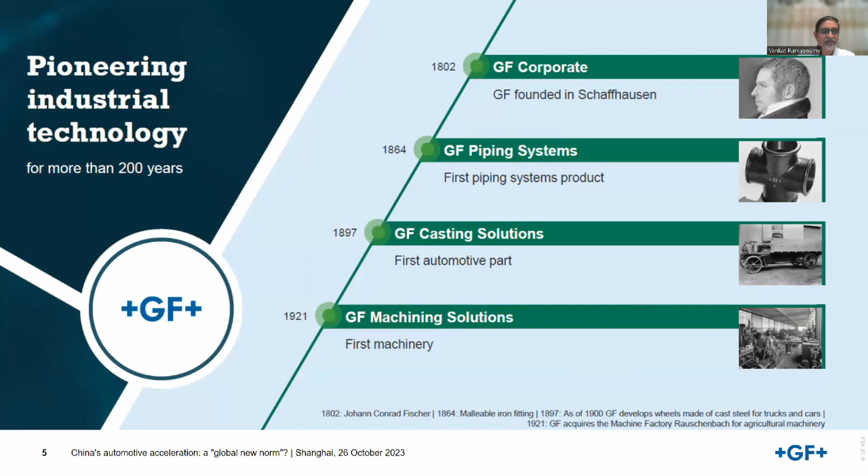GF Group is present in 39 countries with more than 15,000 employees, and about 89 production sites and 11 R&D centers spread across continents. These sites include a technical center, center of competence, a training and workshop area, and a huge service and spare parts location.

We are a sound and professional organization. GF Machining Solutions has a unique approach: to focus in depth on certain segments in order to ensure we provide solutions stitched to the individual market needs.

Understanding the customer and knowing the market trends is very, very important. We regularly communicate and exchange know-how and develop unique solutions for the problems of each individual segment.

GF Machining Solutions is spread across continents, and at GFMS we ensure we stay close to the customer and have advanced technology centers that give the best trainings, do faster test cuts, and display how customers can be cheaper, better, and faster.

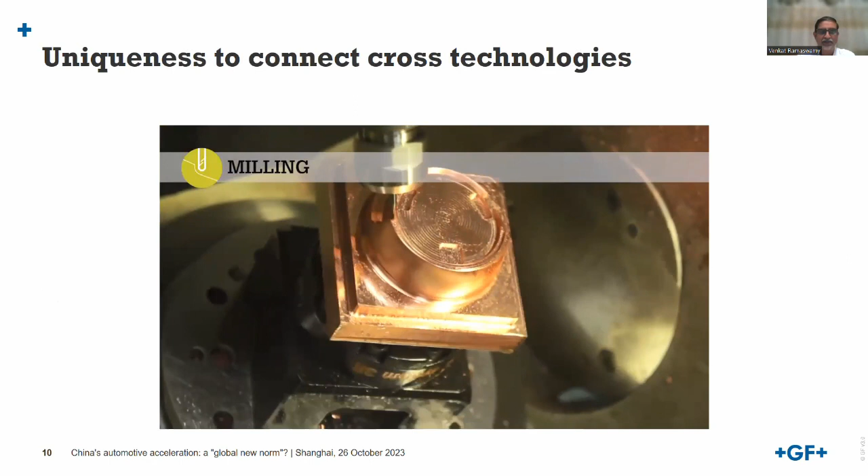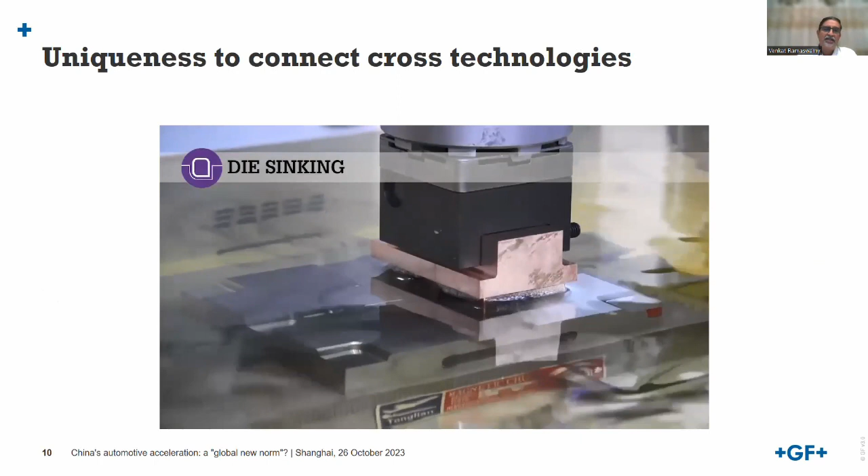I will show you a small video. GFMS is the only unique company that can have a proven solution to connect technologies for a tool or a mold insert from a milling. You may also want to move it to an EDM, either with quick change tooling, and then you may also have the same tooling move into a wire EDM. So you don't lose reference, you don't lose accuracy. You may also have some tooling that requires laser texturing or laser cutting, so you can seamlessly move either manually with quick change or with automation.

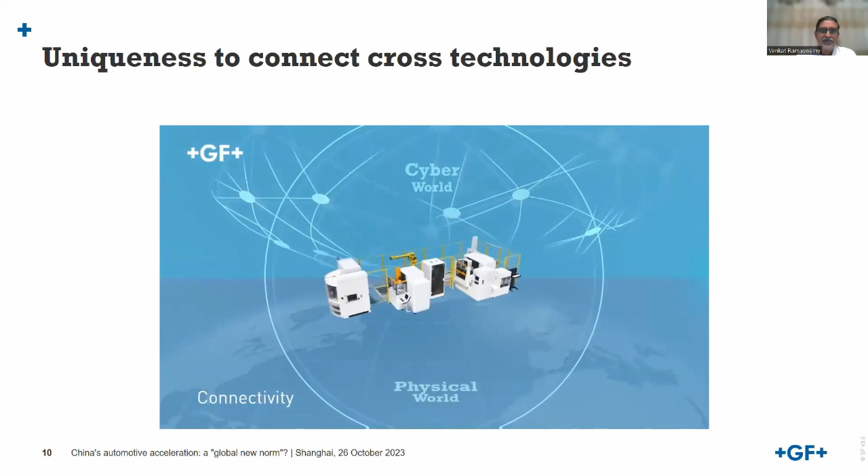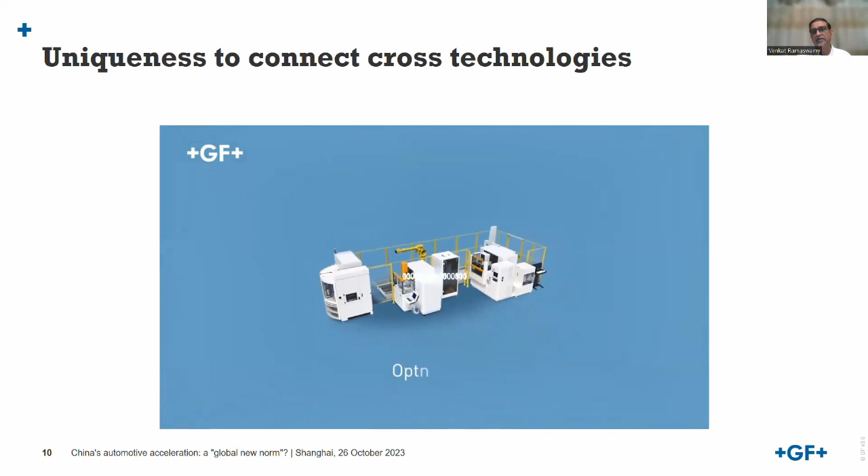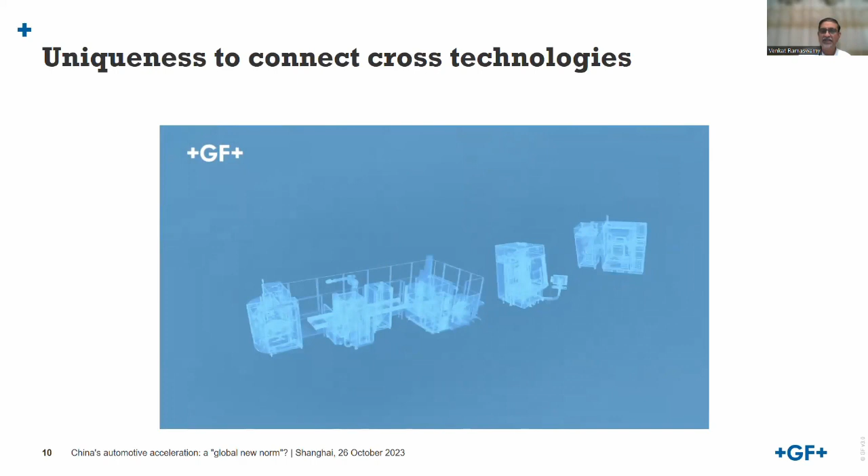Once you can do this automation, you are able to connect all kinds of technologies, accessories, CMM and so on in one cell. And it ensures that every part or mold coming out from this cell is 100% within drawing limits. You gain flexibility, you gain intelligence, you get data, and then you can optimize it. Once you optimize, you can also replicate this in your other facilities across continents. And when you have a next phase, want to add another machine or another technology, it is very easy and quick. So you can be flexible and sustainable. This is in a nutshell what GFMS offers and our uniqueness.

Now what I will do is show a set of data where we can see what is happening globally and also more focused on China, to understand China's automotive acceleration. We will also touch on what opportunities this is opening up for us in the room as mold makers across continents outside of China.

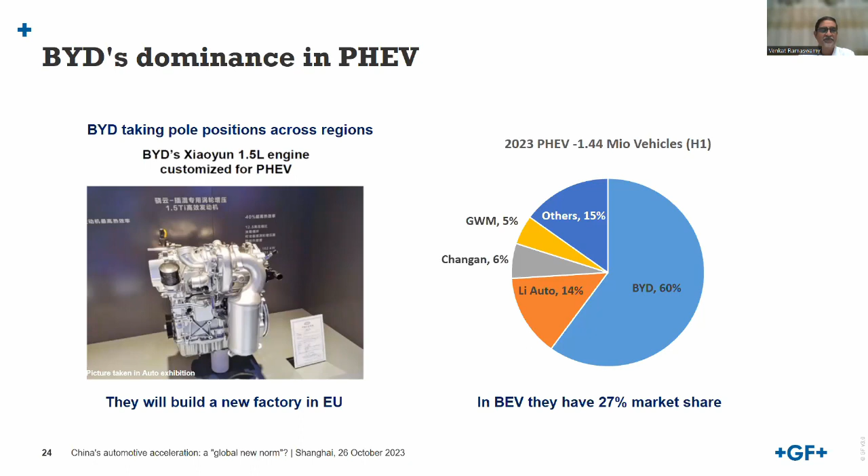So in China, the automotive segment is also well backed by the government. There is a 5-year plan that they announce, and the last one was the 14th 5-year plan. If anybody wants more details, you can write to me, I can share. The government details it very clearly, the goals and how it can be achieved, what should be the way, everything is detailed. This helps the entire supply chain get prepared and adapt to the new developments.

I was reading in publications recently in the ETMM magazine, which mentioned that in spite of COVID market downturn, currently in China, Chinese tool and mold players are edging the technology gap with the revolution in NEV. The report says that in the areas of mold for parts of plastics and rubber, forming tools and punches, sheet metal, and die casting tools, they are really having growth going to a positive side. The article was also conveying that this is similar in Europe, but very slow, or just starting the revolution of NEV. So there is something coming near the doorstep. The article is indirectly conveying that good things will also come to Europe soon.

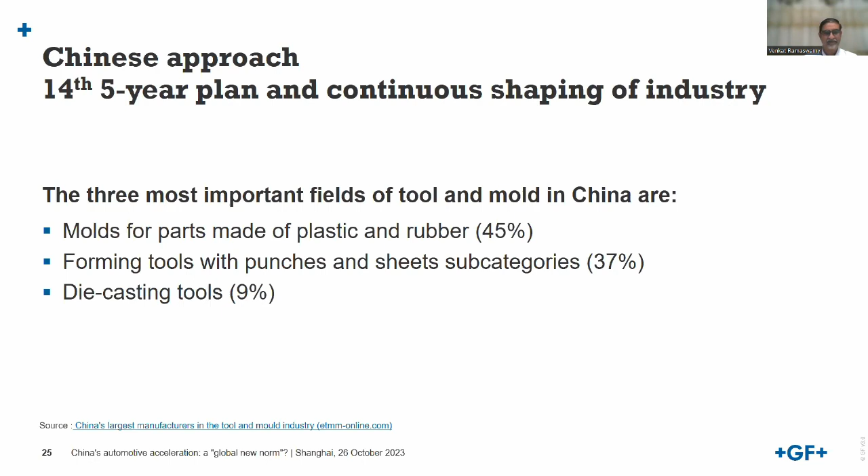So what are the challenges the mold maker faces in China? As in most countries, China also faces a labor shortage. Don't be shocked, because it is a huge problem - there is a severe shortage of high quality labor. Mold makers are looking to differentiate among their peers, because the study in the ETMM magazine also conveys that in China there are more than 221,000 active mold makers.

So they are looking for solutions to machine wide varieties, small batches, and they would like to connect technologies and be flexible. Because remember that with all this new NEV, there are a lot of new materials and tough materials applied, so the flexibility of machines to handle them is very critical and important. China mold makers shifted to automation and digitizing the entire manufacturing process. This helped them to increase efficiency, reduce labor, and be sustainable. So the digitalization of not only the CAM process, but the entire factory shop, helped them gain economics.

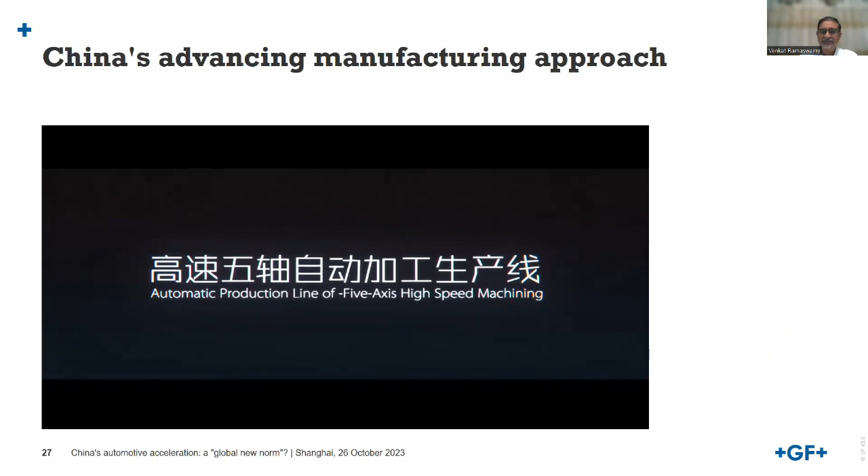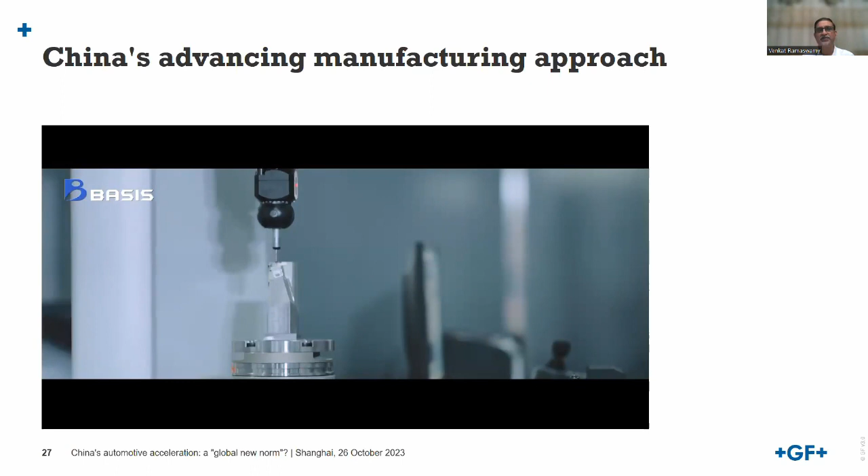This company basically does large and medium-sized molds, front-end modules. They also do dashboards, door trims, central console, seat trims, and so on. What they did is move all the insert and mold parts into an assembly, into this automation line.

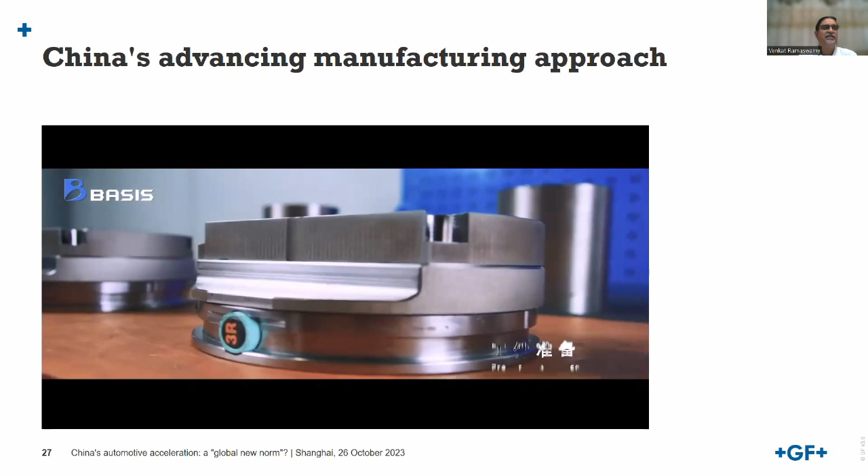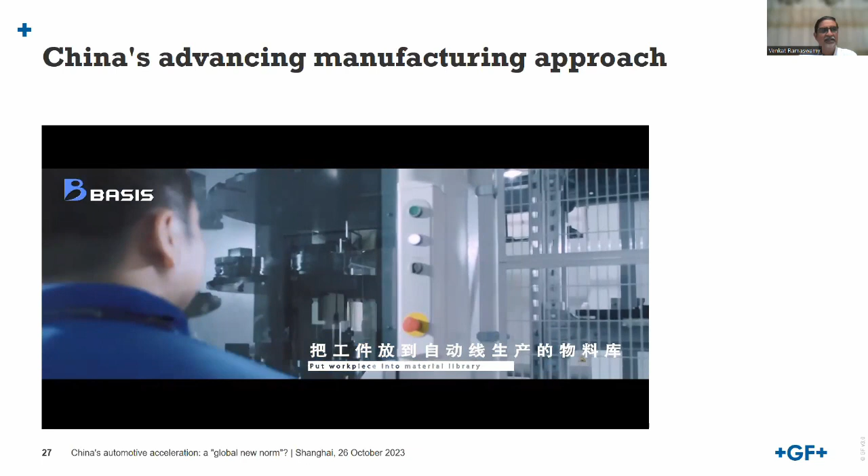They did this around 2015, integrating the technologies together, and they also incorporated CMM in the same line along with other accessories, so that every part coming out is 100% within drawing limits.

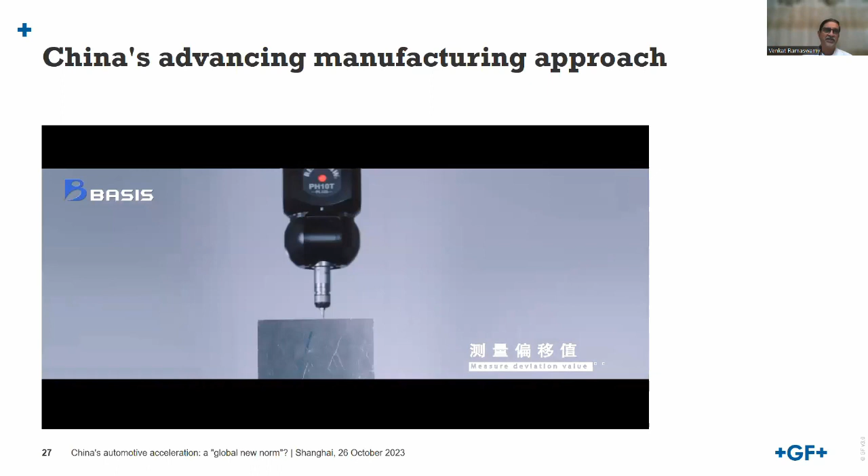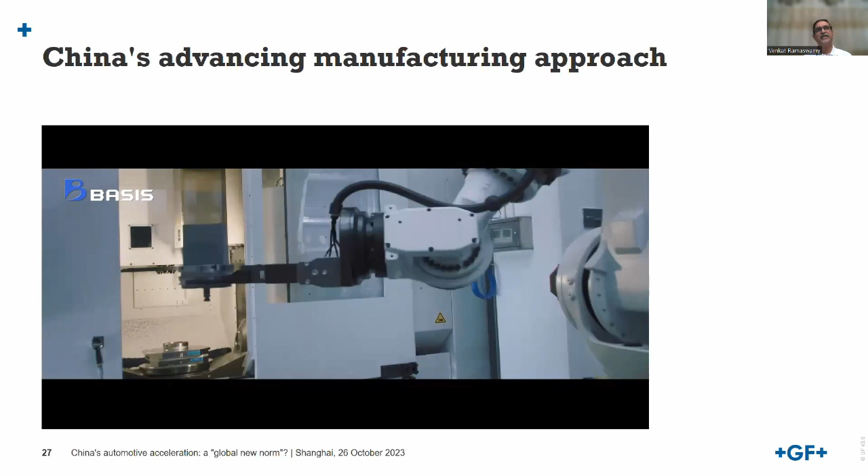After 3 years down the line, they set up a separate unit, fully digitalized, automated mold shop. They started to replicate, moving complete tooling into the automation line, which also helps them run unattended in the evenings, night, weekends, and during emergency periods.

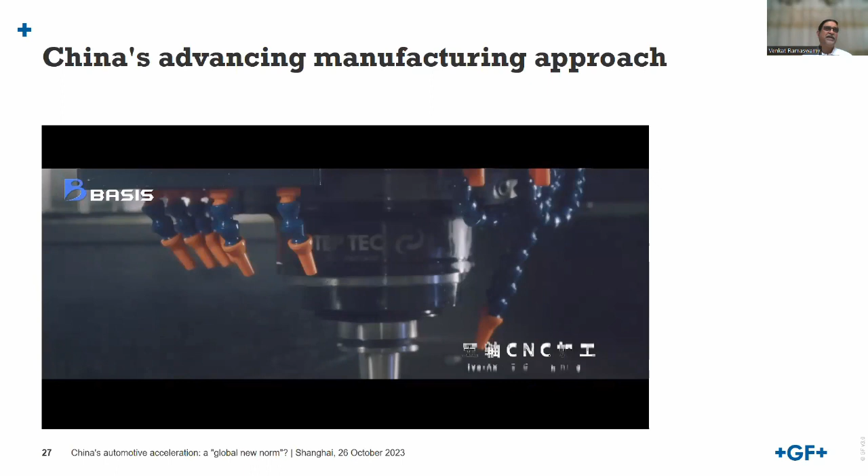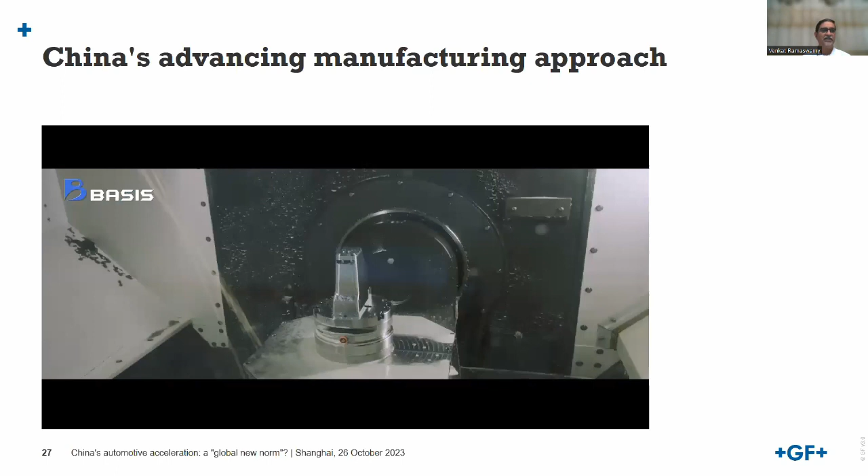So it reduced the number of labor, but they digitized the entire process—all standard operating procedures became digital. This really helped them, and they were at the forefront, pushing many Chinese companies to move in this direction. GFMS sold a lot of automation lines in the last 4-5 years in China.

But this is also not easy. So what is the unique practice that Chinese companies are adopting compared to traditional companies?

I was at an innovation roundtable workshop several years before, and a professor from Tongji University, one of the famous universities here in China, was delivering a speech on key trends of business model innovation from the perspective of Chinese companies. I recreated this based on his sharing.

This is China's disruption compared to the traditional company. What you see is a traditional company: after every S-curve of a product cycle, there is a gap before you can move to the next one. Traditional companies fill this gap by taking a disciplined jump, because before they move, they have to understand root cause analysis, do testing, and spend huge cost, time, and approval before they can move to the next S-curve.

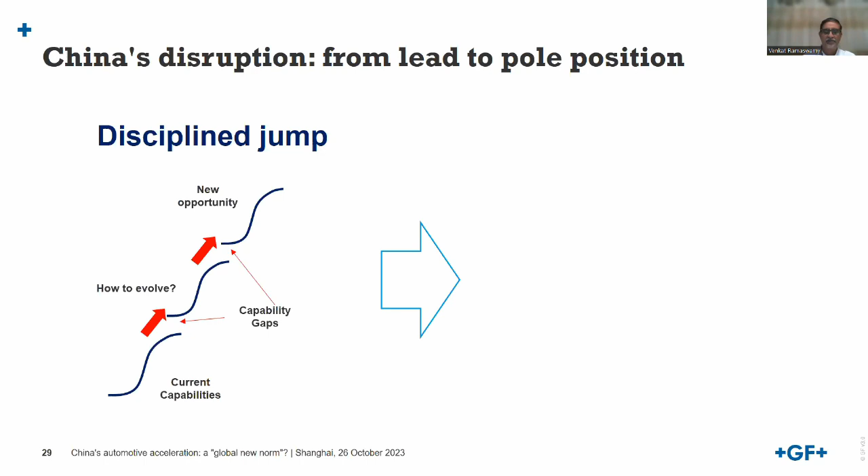Alternatively, Chinese companies do a quick jump to the next S-curve. They know there is a gap, but while moving to the next S-curve jump, they parallelly fill the gaps—certain things done internally by their own team, and certain things using external leverage, external companies to support and complete the gap. This helps them move faster to develop new parts or new programs, adapting very fast and reaching the market faster.

This is helping them bring in new products even with very short product life cycles, and this is really what happened with NEV cars—a lot of new models coming in, even faster than handphones, attracting young and new buyers. In China, according to the data, there are about 100 NEV brands, and they build and sell cars in hundreds.

So this is the unique approach Chinese companies take. Probably it can also be adopted in your respective companies.

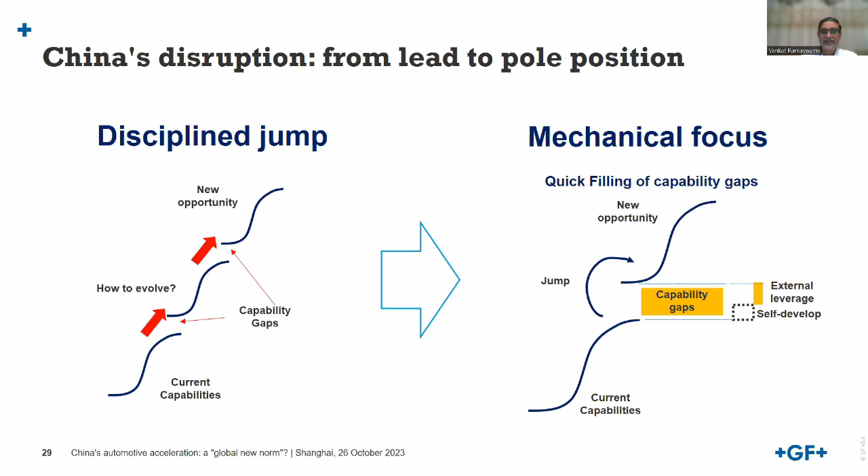What I did here is take an article published by Aachen University, WBA Tooling Academy. They published a report on what should be the differentiating factor for a mold maker, looking at different countries. I took the example of a German tool and die maker—they went to all the mold and die shops and looked at how they differentiate, either by quotation price or by delivery time.

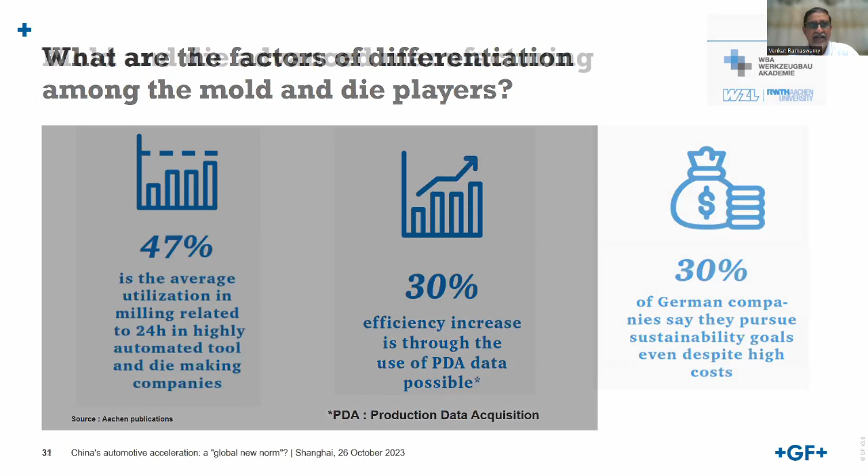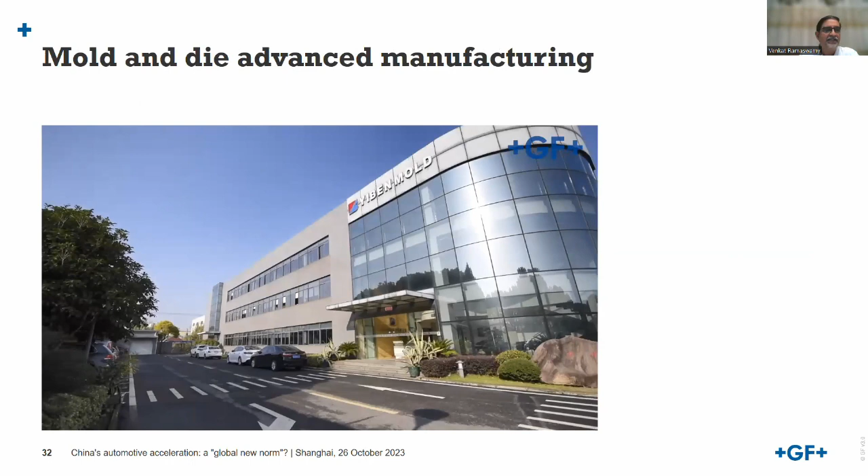I will show you a video. This is very unique, it will reflect whatever we talked about, or the study from WBA also reflects here. This is a company called Yiben. What they do is the sealing of car doors and trunks, etc. This is very critical, in particular for NEVs, because the air should not leak, water should not go in. It should have a perfect sealing.

They make 700 molds, and they also make the machinery for the mold. So it's a good one. They have only 350 employees but make so much tooling. And they supply to BMW, Benz, VW, and many other OEMs. They are really very good in the market.

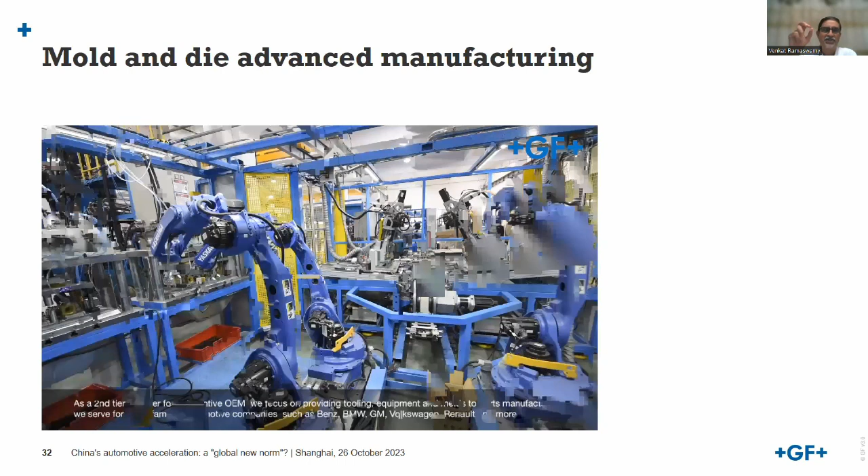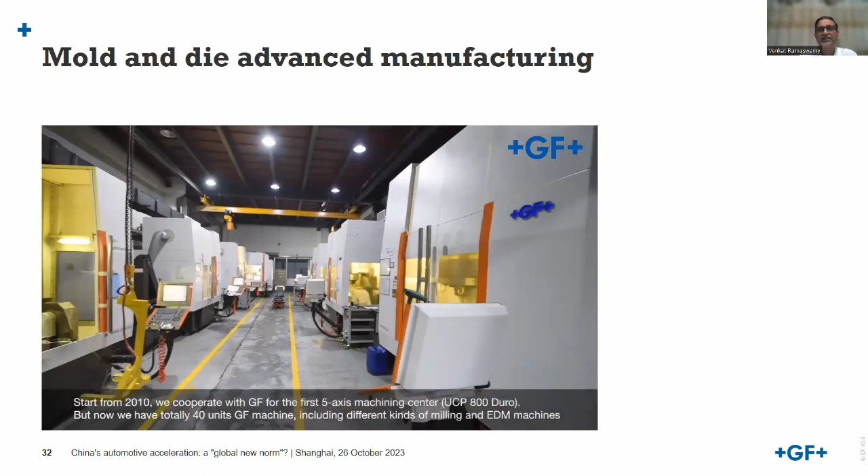Initially they were having a lot of standalone machines, EDM, milling, and all that. About 5 or 5.5 years before, they wanted to move into a fully digitized automation cell and have all data integrated. They put in this automation cell, digitized the entire process, to have complete knowledge of the die, the tool, and the insert, whatever they are doing in the machine. The tool grip, everything was integrated so it can exchange data and do a complete holistic manufacturing.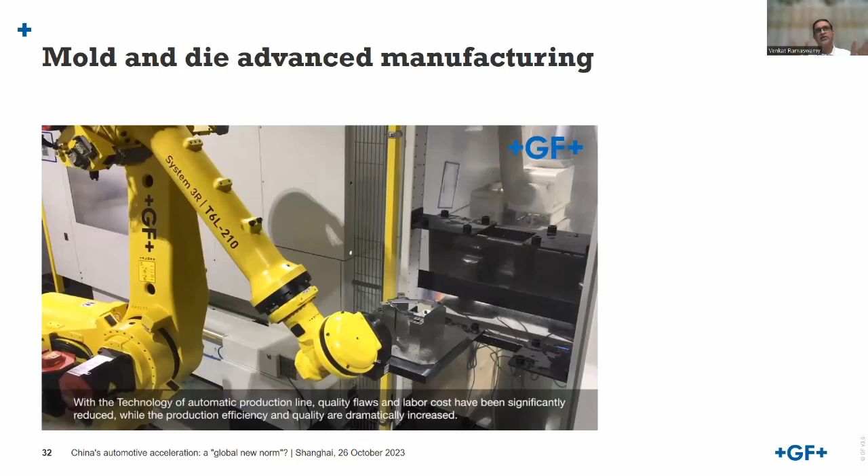The good point I want to convey to all of us in the room here is, as a mold maker, we should consider this head on. Yes, it is a capital investment, but I can tell you most of them, not only in China, but across continents, see good returns and secured perpetual returns. Year over year, they make good money.

Here, what they also do is they have an automated mobile robot to pick the machine parts from this automated cell, and then move them to CMM or EDM or wire EDM to do the post process. If anybody would like to visit this company or the other company, please feel free to inform us, we can arrange for the visit.

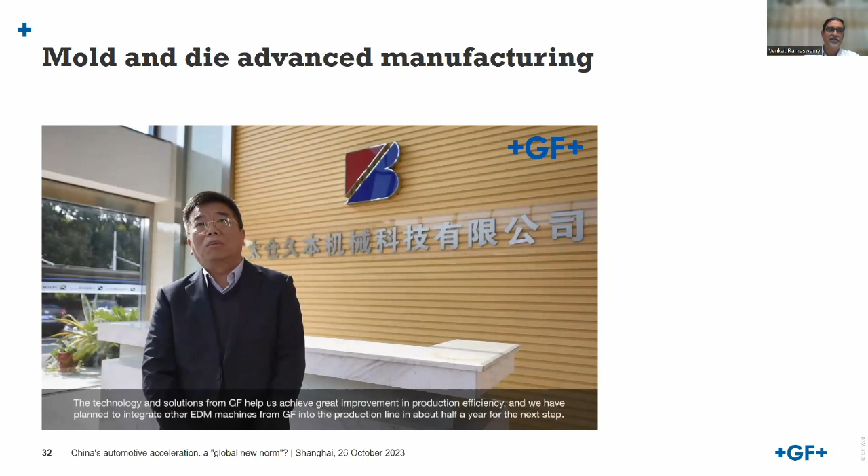But this is not just happening in China. I was reading a recent Mold Making Technology magazine, and there's this company called Burteck, based in the US. They have a factory also in China, and they shared this experience and know-how back to the US company, connecting all the technologies.

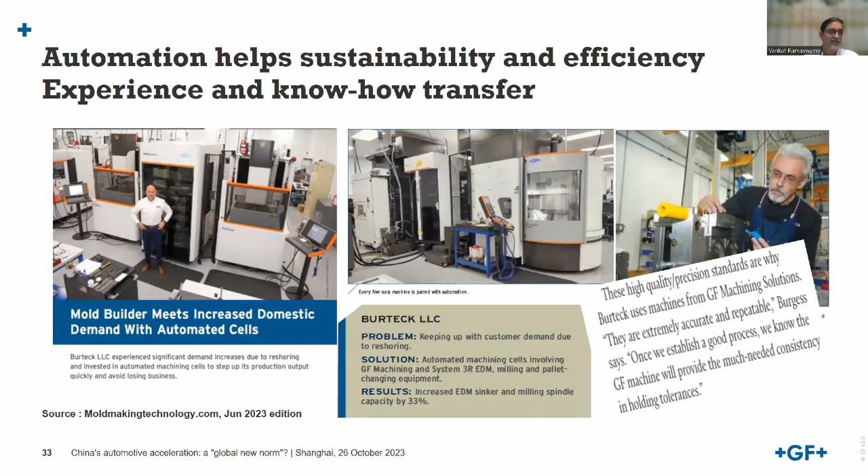So let us move to the next part: what are the trends and opportunities that this can bring to us as a mold maker.

I will start with something most of you might already know, CASE. CASE is simply the first-letter word of Connectivity, Autonomous driving, Shared mobility, and Electrification. Many companies also call this new mobility, and this new mobility has brought in new energy vehicle powertrains.

There are many different designs available within the hybrid or plug-in hybrid space, at least 5 or 6 versions more prominent in the market. Then on the pure green side, there is the pure battery energy vehicle. And the new one coming up, which in my view will even challenge battery in the next decade, is hydrogen fuel cells.

Today, a lot of investment is happening across the European Union, China, and also the US. Governments are giving a lot of subsidies, and a lot of things are happening there. But in a nutshell, one good thing happening in the market space, due to geopolitical reasons, is the regionalization that is bringing manufacturing back to happen within our regions. This is one good thing happening due to this new mobility rise and also due to the geopolitical tensions.

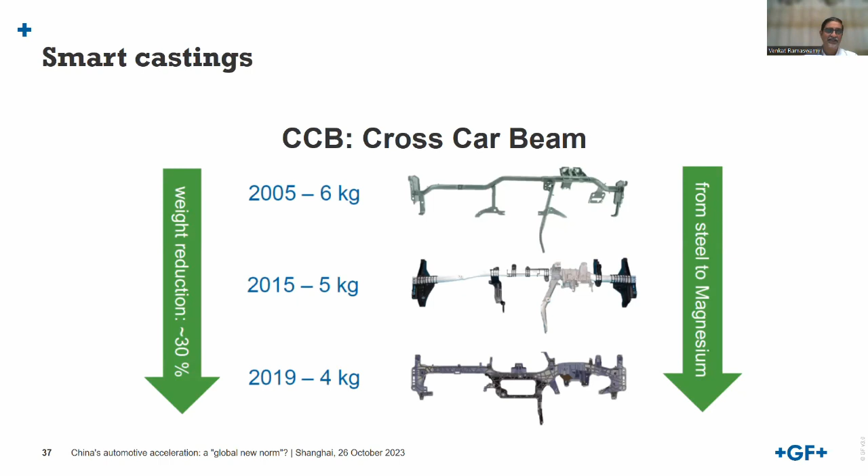There is something unique happening, what is called smart casting. In my view, this could be a very good new opening that moves casting to the next level. Fraunhofer was publishing this research, and they did the test for several OEMs.

So they basically embedded RFID chips into the casting. Why they did so is to have traceability and to find counterfeit products, and then to do condition monitoring during its lifetime, and to also have safety during the autonomous driving cycle, because now we already are in L3 or L3 plus.

There are already several OEMs that are launching L4 or L5 level, meaning you don't need to really be in the car. So the car should be safe and driving smooth. This could be another new thing already coming in the market.

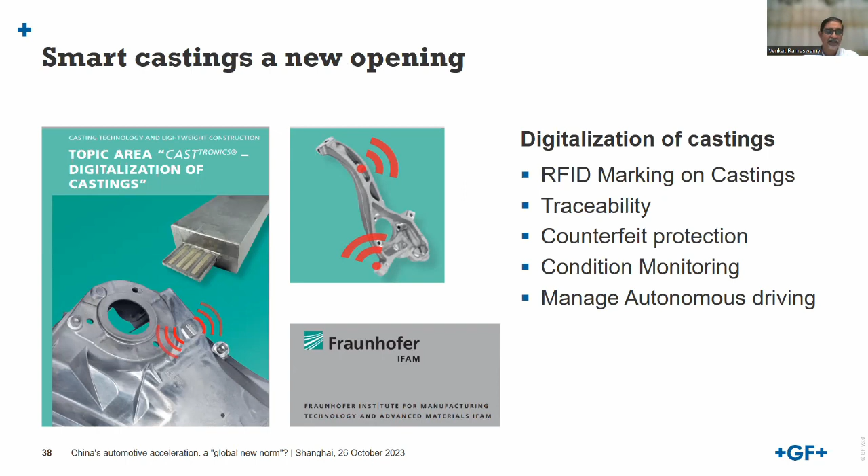Another critical thing is what is called rapid manufacturing. This is getting very important and very popular because most of the OEMs are pushed to do faster prototypes, faster product development, because they have the pressure to reach the market faster, and more and more new models and design upgrades are coming.

Turbocharger, this example from GFMS is a very good example here. In a traditional way, even the best highly capable companies would need easily between at least 6 weeks to make, from the design to the complete manufacturing.

What we did in GFMS is we made a proven solution. We made the design with the metal additive software, and we made the part by the metal additive itself. Then with the help of a unique CAM approach, we did the complete machining process after the metal additive. So you can see here, even the build material, you don't need to remove anything. The CAM can already take this model and then do the machining on the milling machine.

You can see the video here. This really helps to bring the entire product life cycle to be so short. Today, many applications are there. For example, OEMs for both motorcycle and car are producing spare parts with this kind of metal additive, or even using polymer, to have new product developments.

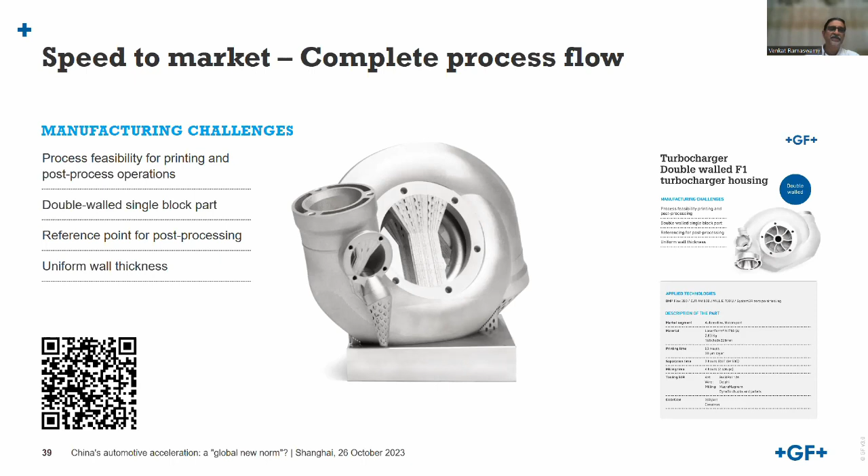As all of you know, this is coming out of Tesla's engineering. What Tesla did is they transformed 70 molds into one. They made a bigger mold, and this technology they pioneered, but it is still not, the acceptance rate is still not visible everywhere.

For example, in Europe, Volvo is doing it. In the US, other than Tesla, Ford is working on this on certain parts. In Korea and Japan, recently Hyundai is working on that. But in China, all the new battery electric vehicle companies are going this way. The Chinese companies are very fast to adapt, and they get into these new technologies grasping very fast.

But there are many reasons why the acceptance rate is a little bit sluggish. Probably because they said that the replacement of the part, the cost would be very high due to any accident or in the warranty period. But more than that, they were also telling that the handling of the mold and the procedures of MRO are very, very critical. And then the other complication is handling of the part and storage and many others.

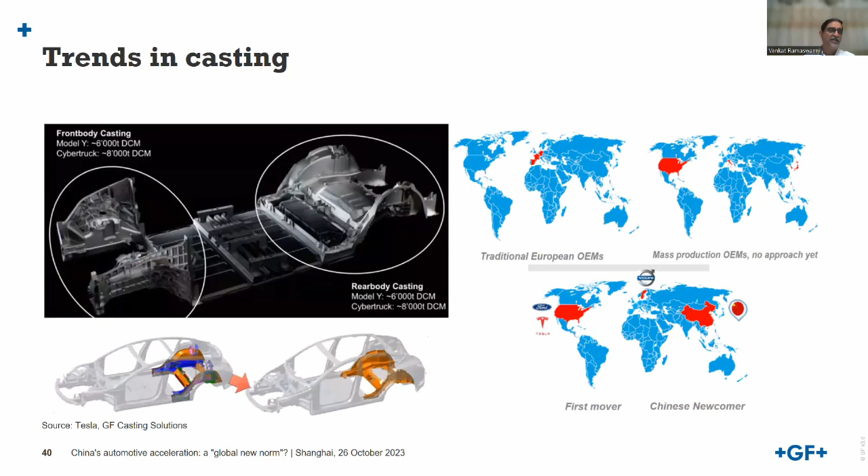So you can see the image on the right side. They are really huge, and at least they need 4,000 tons. Today, many different parts in the battery module, support pillars, the base - everything is getting bigger. You can see the list of companies doing this. This is not a holistic list. The estimate says already there are 130 units above 6,000 tons, but almost most of them are in China.

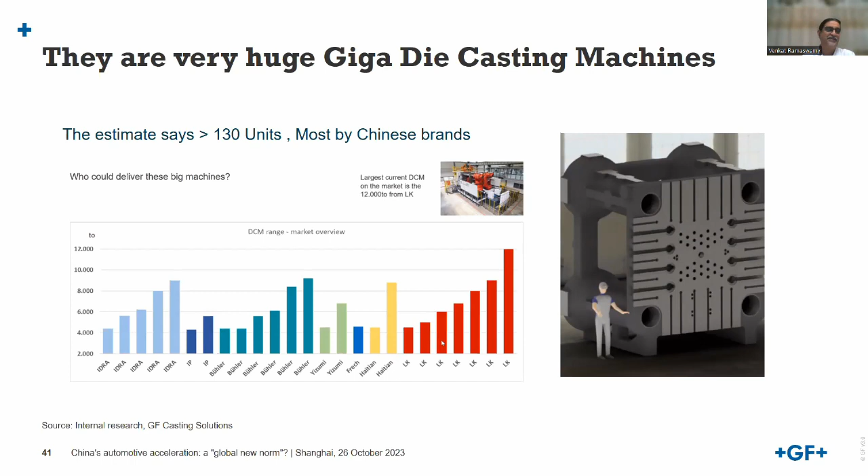Friends, I'm not sure how many of you had the chance to visit any car show or auto show recently. If you haven't, I would suggest please make a visit. I can tell you that all the new NEV cars are really, really awesome, very attractive, both on the interior, the exterior, the lightings, and the ambience inside, the sound system, the noise reduction, noise cancellation.

They're really very beautiful. The new mobility and NEV has brought in huge changes in the interior of the cars, be it dashboard, door trims, seat trims, central console. They all require fine grains, and to have sustainability points, they use recycled plastics and new injection techniques, which is very complicated. So these kind of fine grains or functional surfaces are only possible by laser texturing, right? So mold makers and etching companies have this technology to make a huge differentiation and open new possibilities.

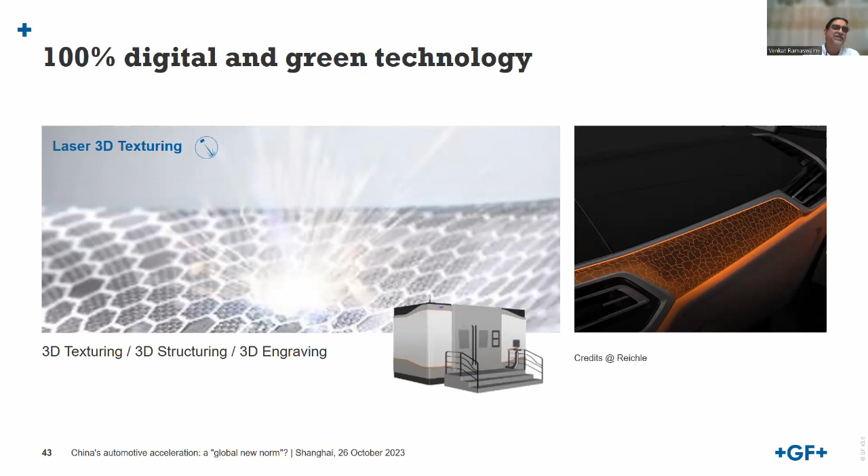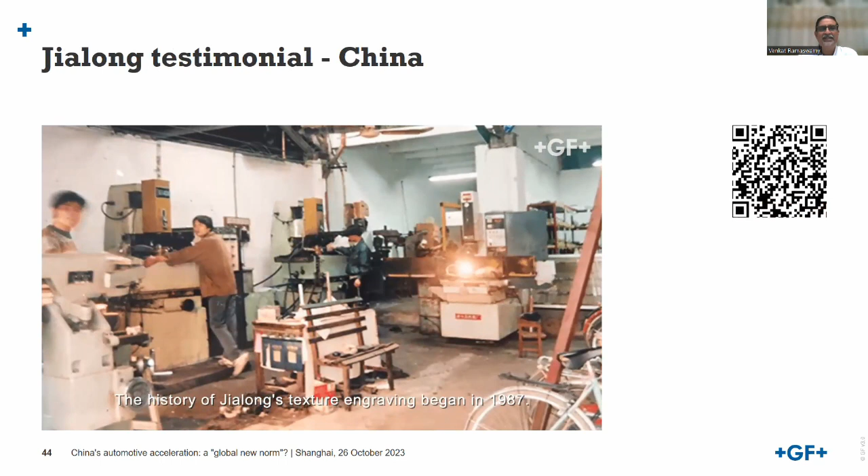So I will share with you a video of this company in China. They are a well-known player. More than 35 years, they were only doing chemical etching. Then in the last 3 to 4 years, they started to move - actually 4 years before they had one machine, but now they have many laser machines. And they were following the traditional practice of chemical etching.

As this NEV revolution started, they found that grain levels of 4 layers, 5 layers, became very difficult by chemical etching. Also, the China government put restrictions to avoid polluting processes, so they cannot discharge waste gas and polluted water out into the system. So this was also another reason why they moved to this digital process.

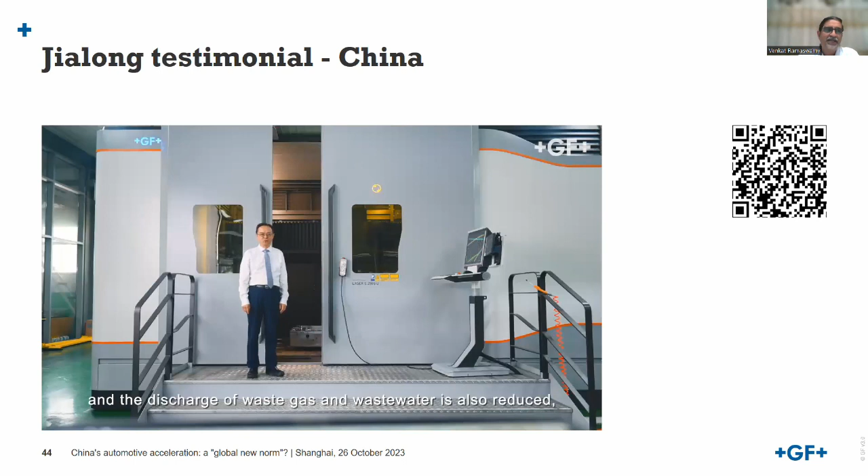Another thing you will see in the video is that they were trying to get rid of this labor-intensive process, which can require many people to work on one mold and can cause many errors. And they want to move away from this.

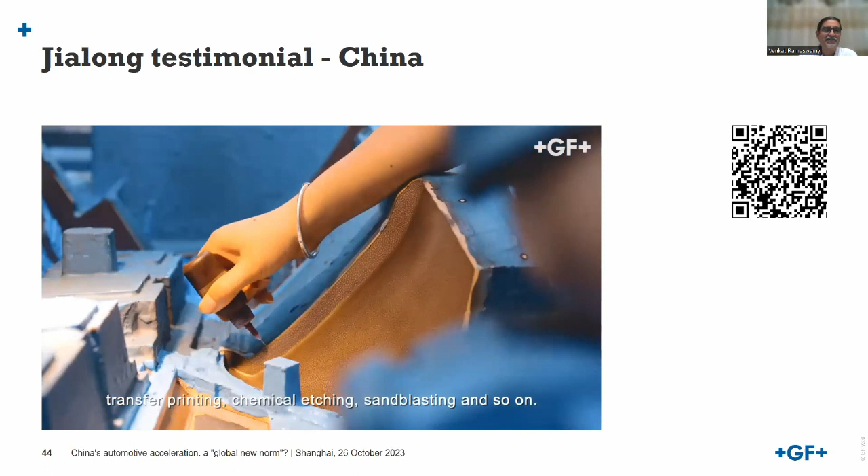Again, the thing is, for these kind of companies, it is capital-intensive, but they moved in very fast. This is the traditional process that is so cumbersome, and it is so critical with so many laborers on one mold.

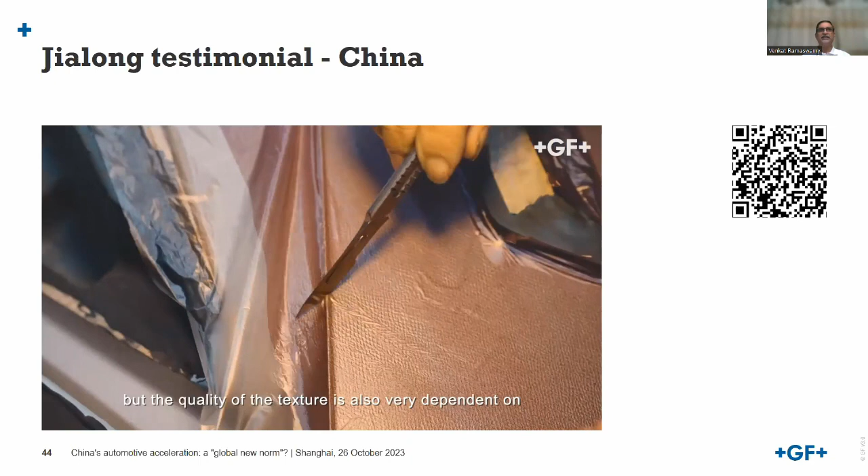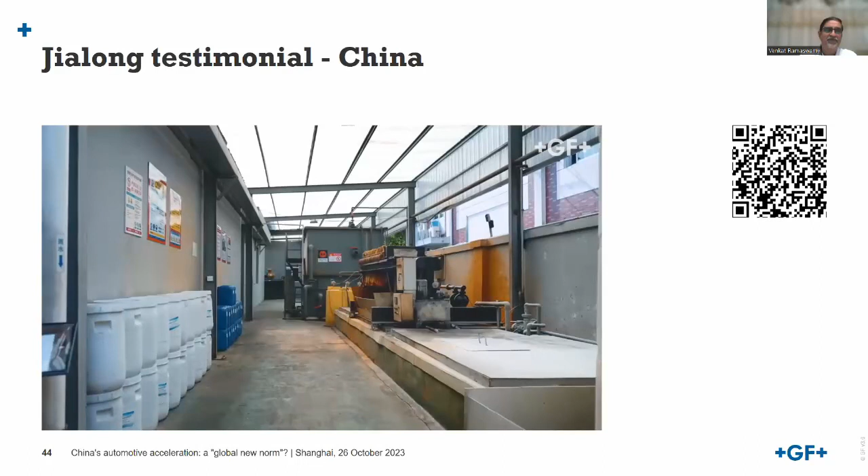The other unique thing this company was also showing is they did the texturing out in the cam area, where they have the fully assembled mold, and they were moving the native file into the texturing area in a fully assembled mold. So this actually reduces the overall assembly cost, the cost of quality for the mold maker. And most of the car OEMs and tier ones are asking for sustainability credit points.

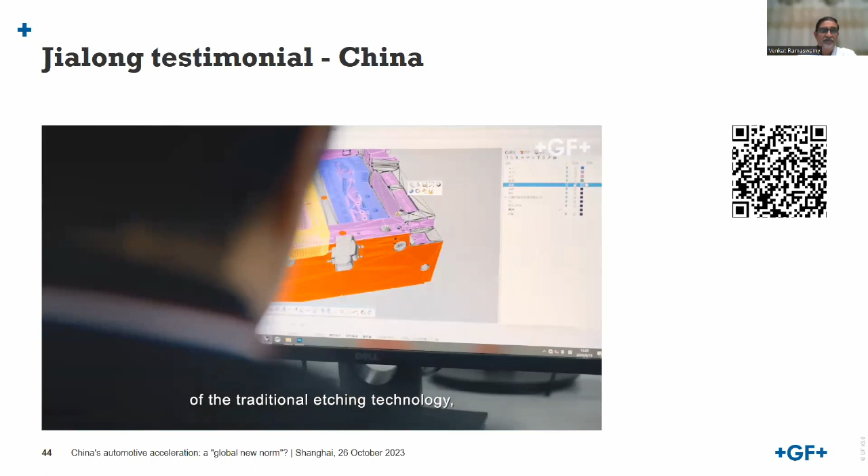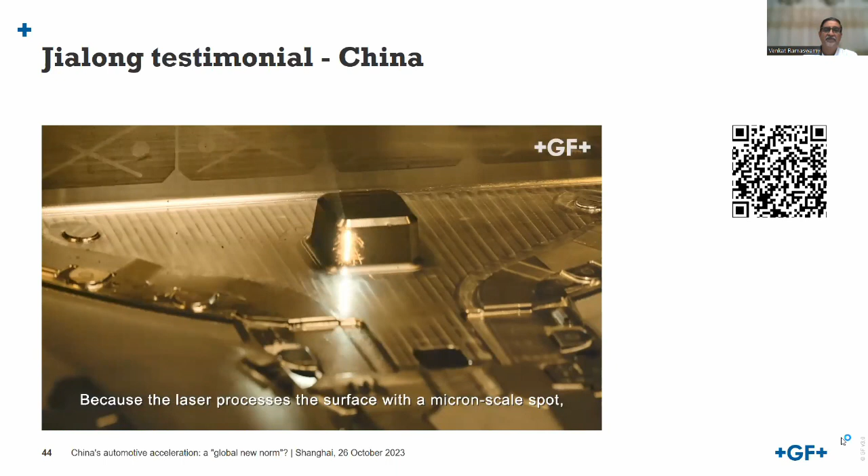So the laser, even if it is a complicated mold assembly, can approach most critical areas. In one setup, you can realize all different kinds of textures. This is really getting more and more into the market.

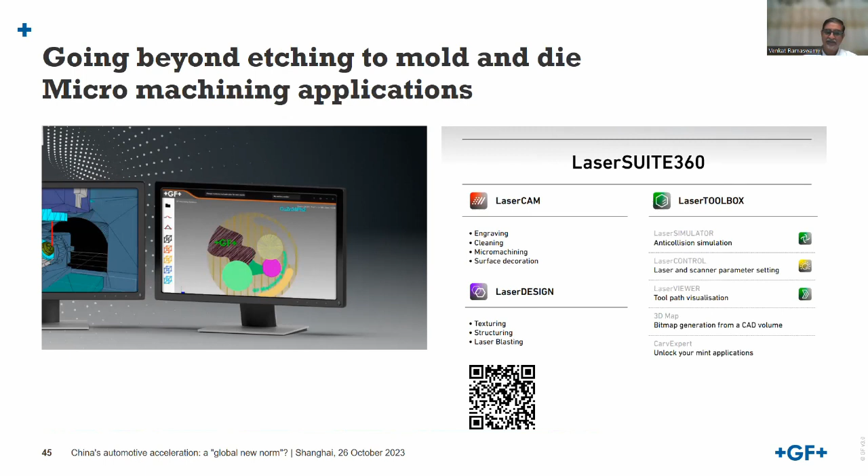And with the new tech development, all this cannot happen without a software suite. The interesting part is we ship it along with the machine, so you need no addition. With new softwares and developments, we are even applying this laser on mold die micro machining applications. Today we can do even micro machining of textures on a large mold. Please scan, and if you have anything, you can always contact us.

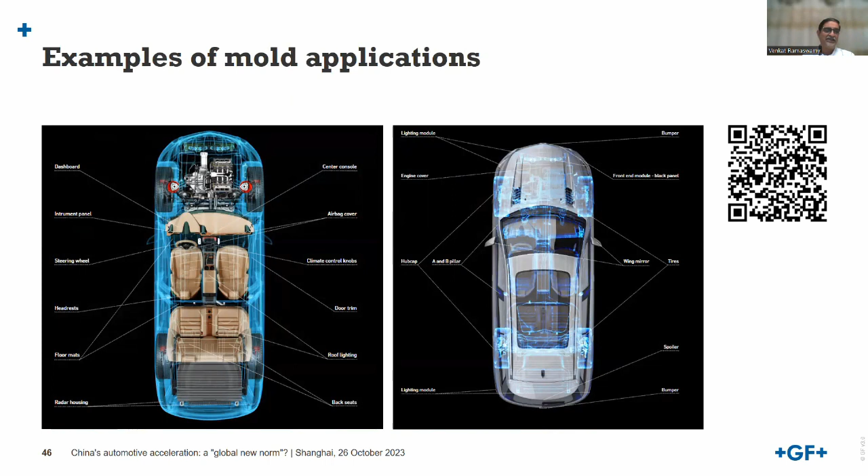In a car today, you can see a bird's eye view. There are so many applications of a laser. Just for your information, the next one coming up on the doorsteps is these charging units, right?

When you come to charging units, you have this high voltage connector, the controller unit, because as you move to electric cars, it is moving from the traditional wiring architecture to zonal computers, right? So there are a lot of electronic control units and microcontrol units — a small connector and also a high voltage connector. And when you say charging units, you have a charging holder, charge pin, which has to withstand all temperatures because it's outside, and they require a cooling channel so the user cannot feel the heat. So it's a very complicated design.

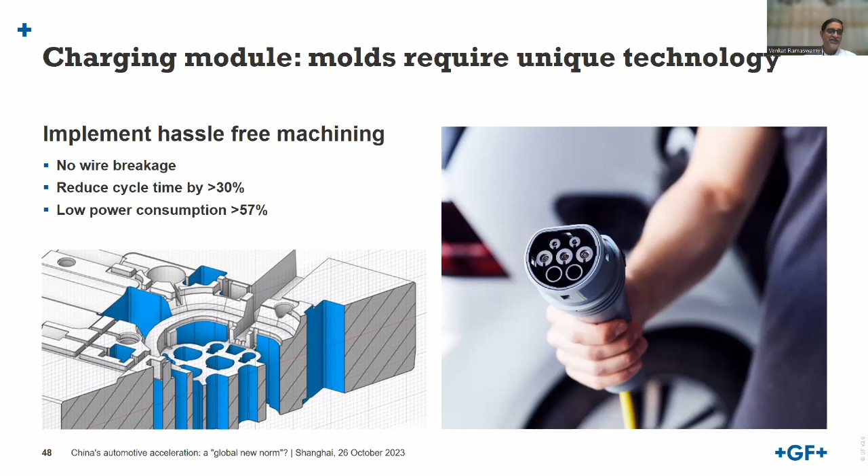So in GFMS, we developed this technology called ISPS, spark control management. What it does is the software can automatically adapt the cutting process and control the spark, so you don't have any more wire breakage. The most critical thing for every mold maker is that day in and out, we do many different kinds of mold, and we have this issue of dependence on the machine operator. So this software, the ISPS, makes you come out of this concern. You no longer need to worry about dependence on the machine operator — the system can take care of it.

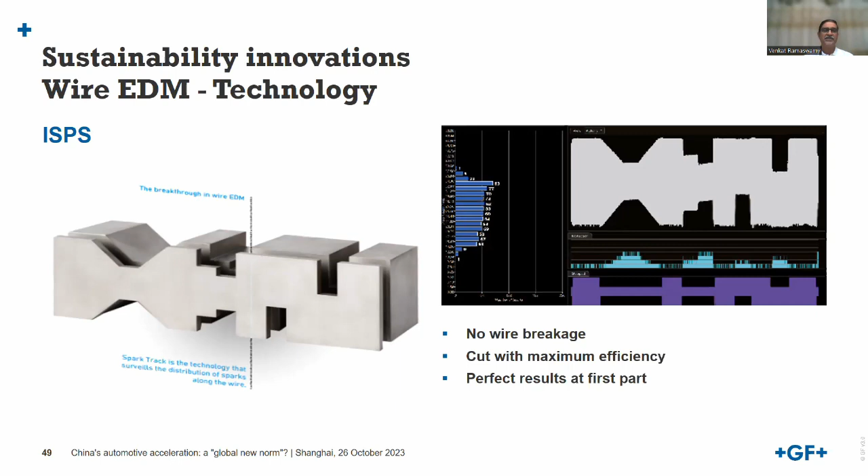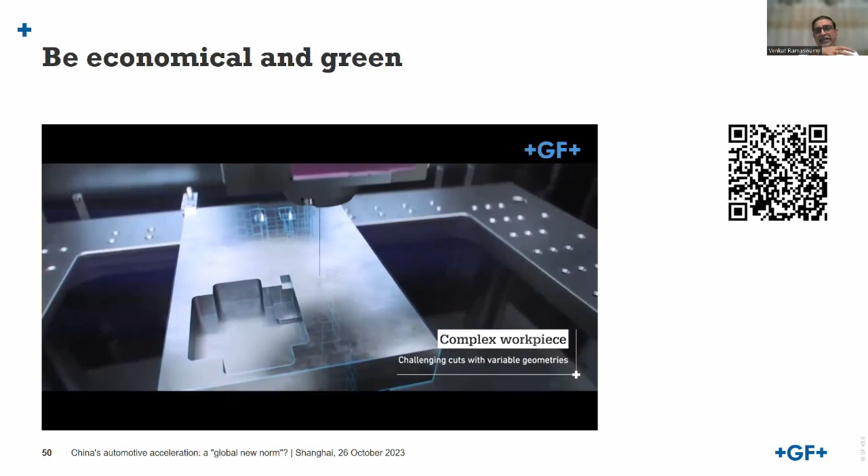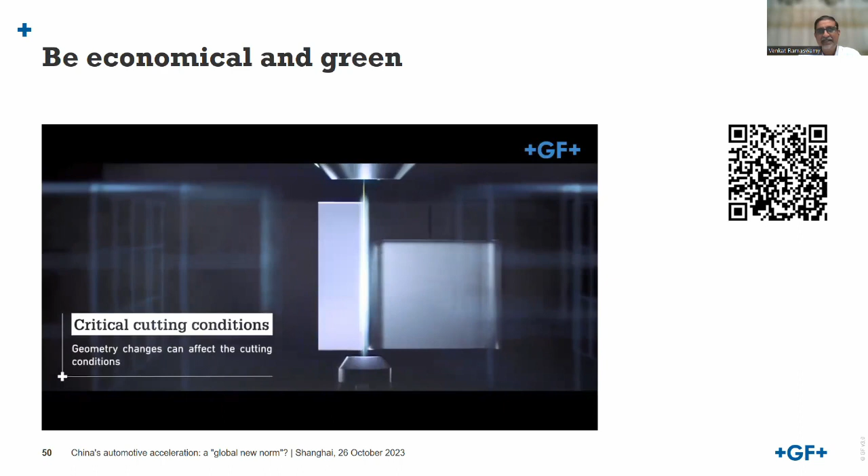So I'll share a video. Again, this technology is called ISPS, Intelligent Spark Control Management. We tested this with many customers, and based on their feedback, it is now available in almost all the product lines in GFMS because it is helping mold makers a lot. What it does is it has an advanced generator located near the cutting area, with some sensors, so the software gets the information.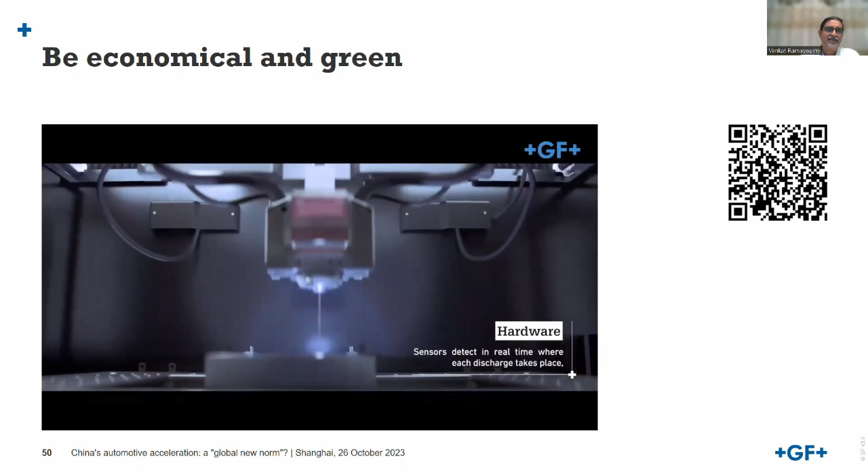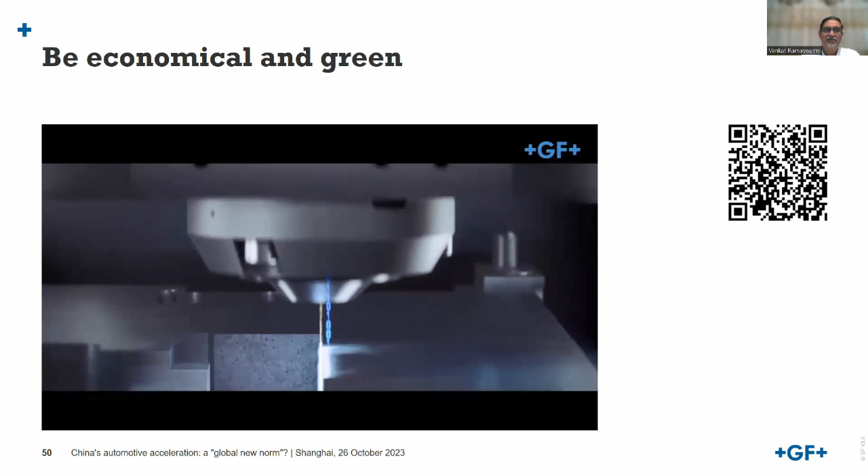So you see the traditional one, you will see wire cut happening at different profiles. And once you have the Spark Track ISPS software, it is very adaptive and smooth, and then you save the wire, save cycle time, and save power consumption. At the same time, you get the first part right without any overcut. And the important thing is you don't worry about your skilled operator availability, right?

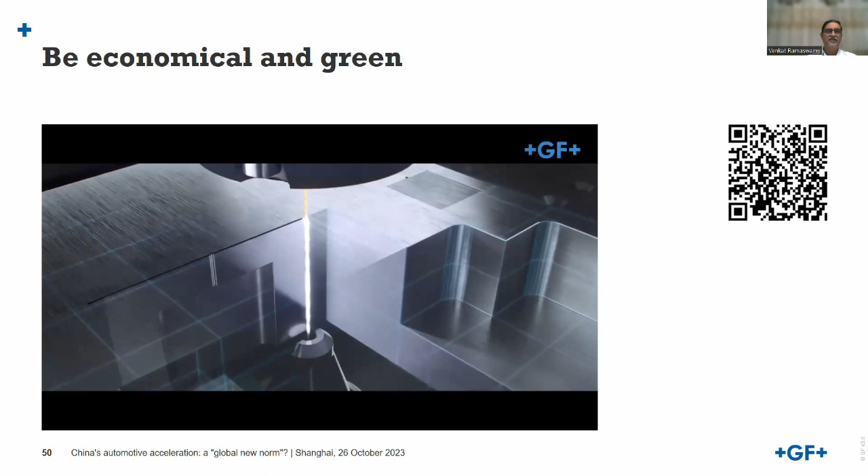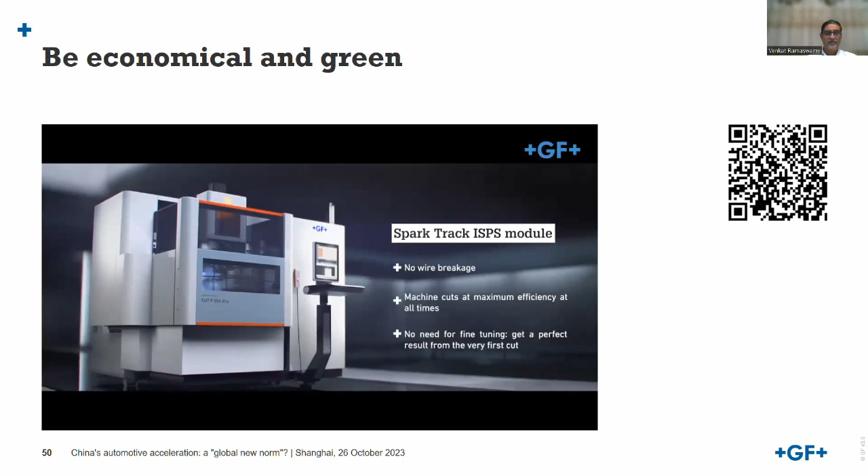So another thing, as we were talking about digitizing this process or software — this is unique for die sinking machines. What we did here is a patented software. What it does is you no longer need to always do the programming on the machine. Now with this software, you can do it from your home, office, or on the move, because it is so easy.

And what it also does is — most die sinking molds are already pre-milled, right? But what we don't know is what is the actual material left at each area, or what gap we should keep. So in GFMS, we developed this digital CAM process that helps make die sinking operations simple and secure. Now you no need to worry about having a skilled operator to do everything — the process should take care of it.

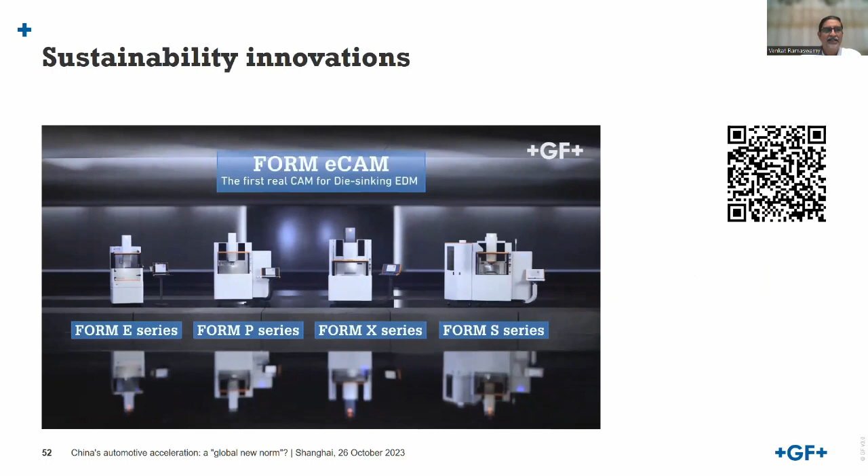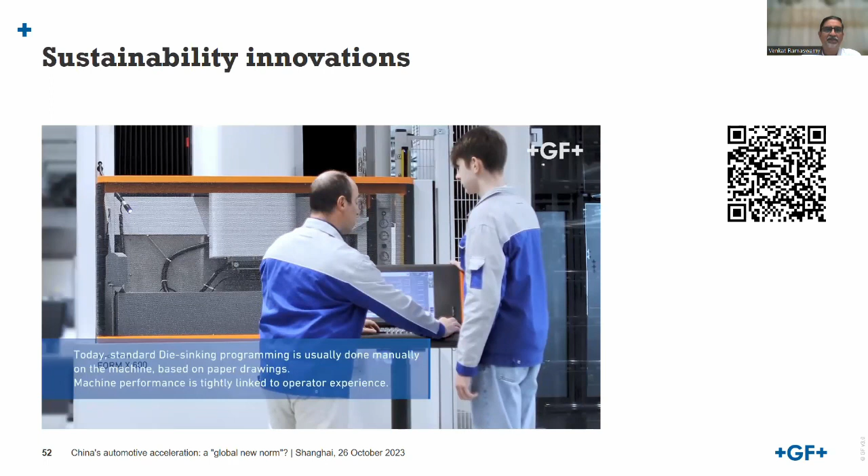So you will see this video that explains it in a similar simple way. We have many customers already using it, with a lot of good output coming out. So I see this as a good example to share with all of you — you don't need to do anything on the machine itself, and the operator doesn't need to remember everything.

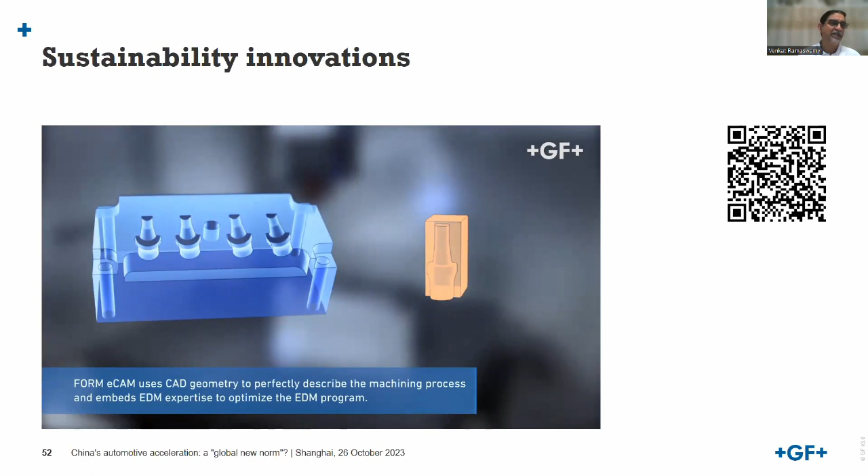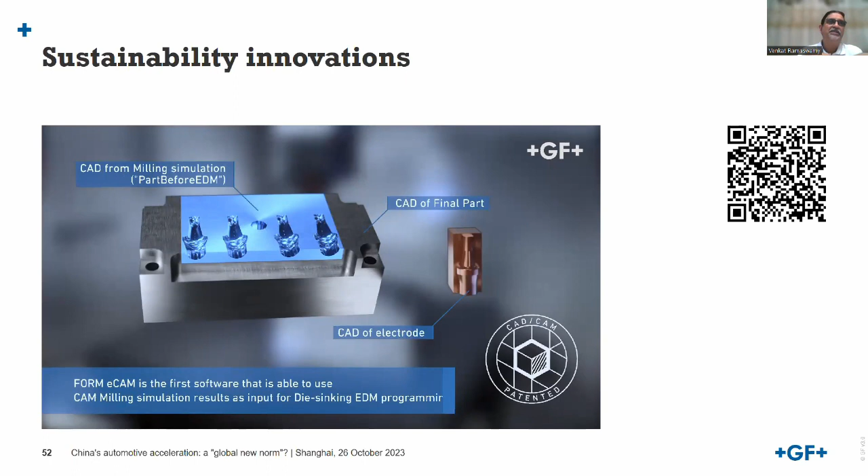So basically, what this software does is it uses the CAD of the milling, the pre-process, and then the software can identify the program according to the stock and the material. So you no need to worry about the effectiveness of the machine or the programming difficulty or cycles to be adopted. This helps you to reduce cost because you are able to produce cheaper, better, and faster because you use less number of electrodes. You are sustainable because you reduce the wear and you can use it for many cycles.

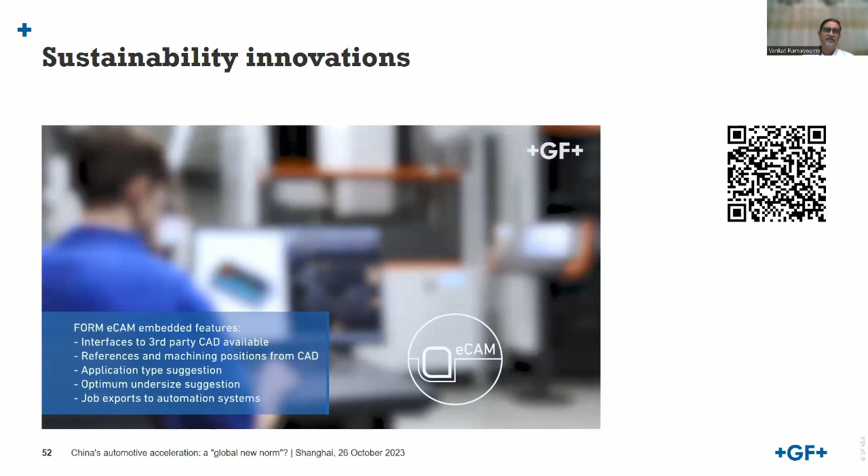So friends, I'm coming to the last segment of my presentation. So we saw many things that came out, why China was successful and what they brought in, the new energy vehicle and the new mobility, and then the parts related to that and how unique their supply chain and what were the differentiating factors that we should adopt. But then to come at what is there for us in the market, right?

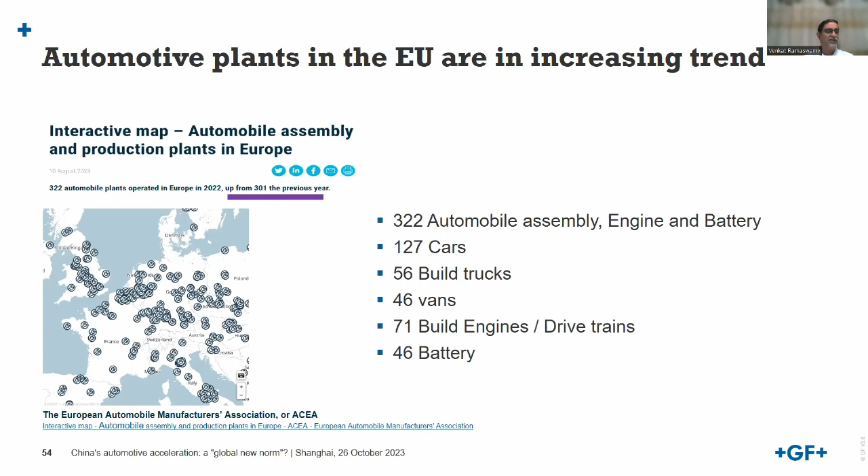What I want to highlight here is the number of OEM facilities has increased by 21 from the previous year. So in Europe, there are about 322 automobile plants. Which means when you have an increase in the number of facilities, then naturally the supply chain also should increase. So I feel this is already the effect of regionalization that is pushing them to manufacture locally. So there will be a lot to come in the near future.

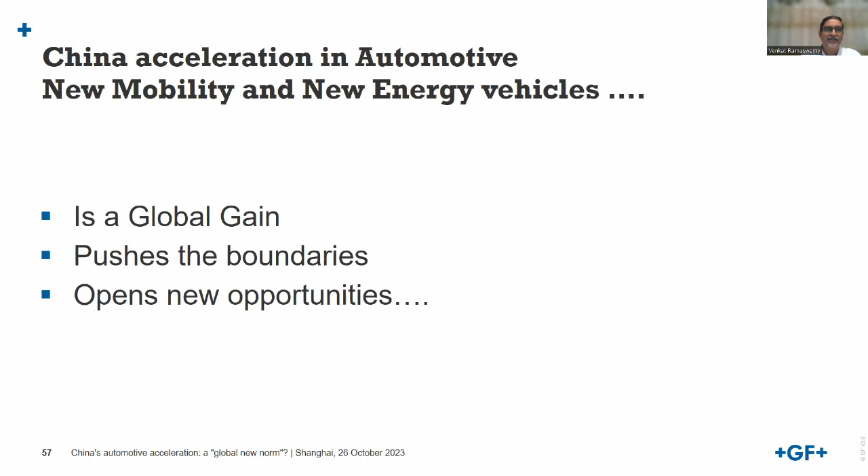So friends, remember that, looking at all this, what I view in my study and experience here in China and traveling across, China's acceleration in automotive, bringing up this new mobility and new energy vehicle market space, is actually a global gain. It is pushing the boundaries of the entire manufacturing supply chain across continents. And this is a good thing, because it's also opening new opportunities for all of us.

So please be reminded, GFMS has a complete stack of technologies. We have a uniqueness to connect all this technology, either by quick change tooling or fully automated solutions, which means you can easily move to Industry 4.0 levels. We have complete solutions available, and we also help you gain your sustainability credits.